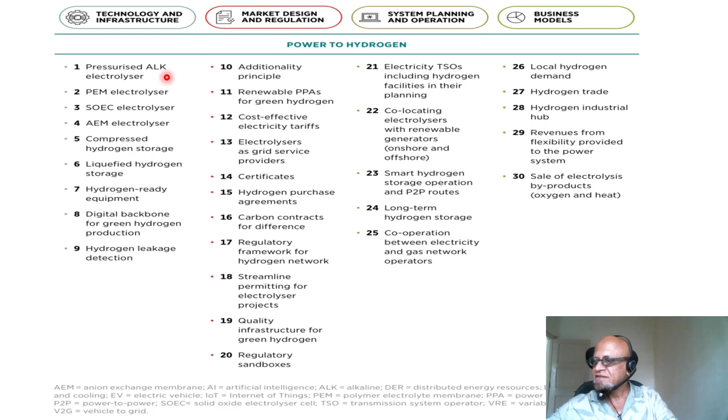Keeping that in mind, you need power to hydrogen, so you need to worry about the same things as before: technology and infrastructure, market design and regulation, system planning and operation, and business models. Let's start here. Pressurized alkaline electrolyzers.

An electrolyzer is basically where you're splitting some chemical like water to produce hydrogen. PEM electrolyzer, that's polymer electrolyte membrane. These are technologies, you can imagine there is a membrane, you are pushing water through and you are separating out hydrogen from something else. SOEC is solid oxide electrolyzer cell.

AEM is anion exchange membrane. These are technologies that I will learn about, but right now I have read about them and I'm teaching for the first time, so I don't remember all of the acronyms offhand.

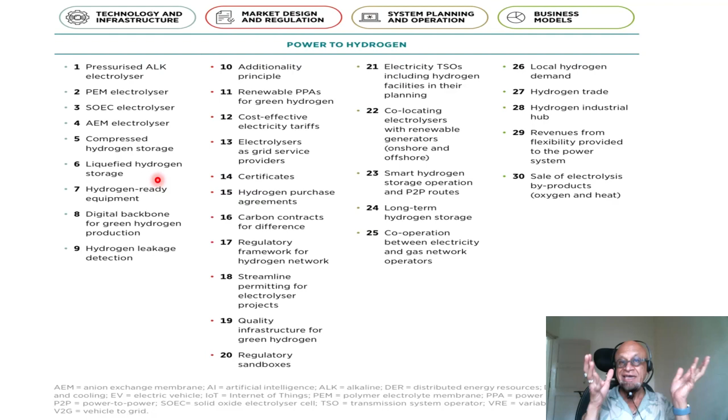Compressed hydrogen storage. Hydrogen always comes up as whether it's dangerous, whether it'll explode, how to transport it, whether it's just a pipeline or whether you can compress it enough, because it's very light, so energy density in some sense is very low compared to oil or gas, so you need to worry about carrying a lot of it in some form, so compressed storage is a big thing. Liquefied hydrogen is of course another thing.

Everything has energy associated with it, so you're always having to make sure that in an end-to-end life cycle analysis sense, whether you're producing hydrogen and compressing it or liquefying it, you're still coming out positive in terms of energy yields, right? So hydrogen-ready equipment, that's not easy, because Toyota invested a lot in fuel cells and bet big on going hydrogen, but it didn't work out, so they are struggling.

Digital backbone for green hydrogen production and hydrogen leakage detection, which is another worry that bothers a lot of people. With EVs you have range anxiety as to whether the battery will take you long enough or whether you'll have a charging station along the way. Now the range of battery vehicles on one charge is getting longer and longer, 200, 300, 400 kilometers, which makes people comfortable once they get used to it. With hydrogen you have the leakage problem that people get freaked out about.

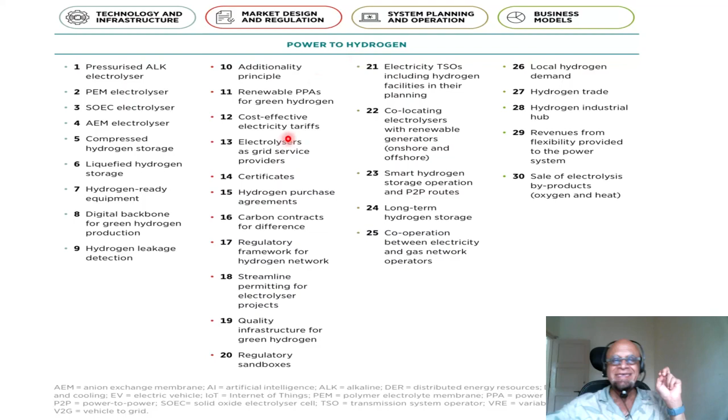In terms of market design and regulation, you have the additionality principle. Basically additionality means you are doing something that is beyond what would happen anyways. So you have to figure out what this is in power to hydrogen. Renewable PPA for green hydrogen. Sorry about that, power purchase agreement. These are when utility companies rely on aggregating and buying and selling, so power purchase agreements. Could be a town or community doing that as well.

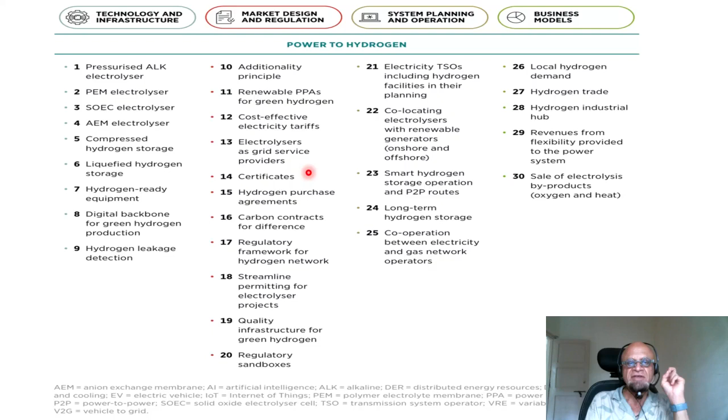Cost-effective electricity tariffs, electrolyzers as grid service providers. So can you directly go from electrolyzer technologies feeding into a power grid? That's a good way to think about it. Certificates about various requirements on safety, cleanliness, supply, reliability, whatever it is in terms of design and regulations. Hydrogen purchase agreement as opposed to power.

Carbon contracts for difference. So what is being saved additionally? Is it going to be part of the offset? Is it going to be priced in some ways, and so on? I'm being a little brief on that. You need to read up.

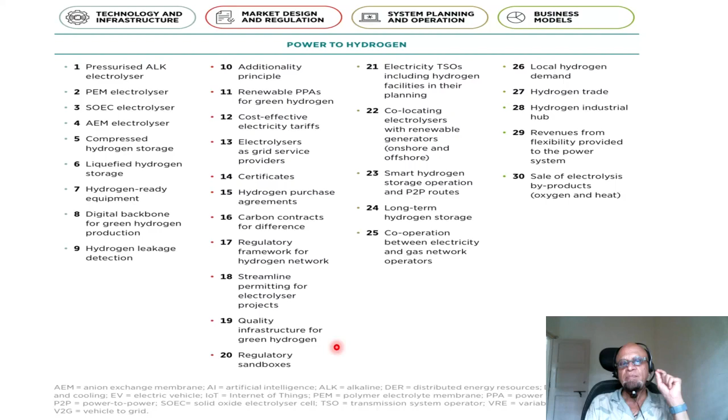Regulatory framework for hydrogen networks, streamlined permitting for electrolyzer projects, quality infrastructure for green hydrogen, and regulatory sandboxes where you play and figure out what has to evolve in terms of cost effectiveness and profitability, I suppose.

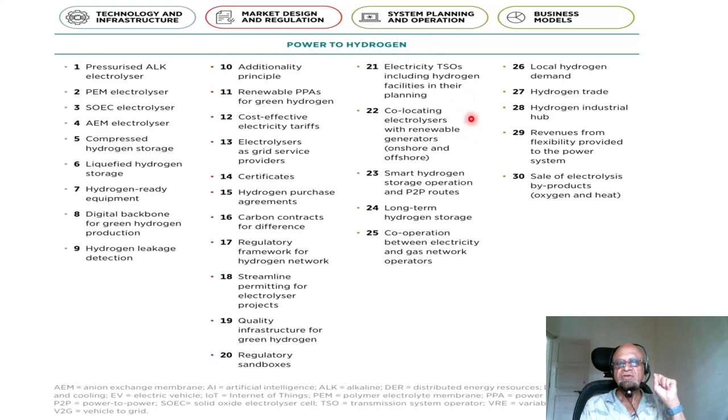In terms of system planning and operation, you have electricity TSOs, transmission system operators, including hydrogen facilities in their planning. So electricity transmission system operators must consider hydrogen as part of their planning. Co-locating electrolyzers with renewable generators, onshore and offshore. There are some ideas of offshore green hydrogen production, desalination, and so on that I have discussed elsewhere.

Smart hydrogen storage operation and P2P, which is power-to-power routes. Long-term hydrogen storage, leak proof, and maintaining the energy, pressure, liquefied, whatever is involved in long-term hydrogen storage. Cooperation between electricity and gas network operators. So you have cables running electricity, but you may need pipelines for hydrogen, just like liquid natural gas and so on.

In terms of business model, local hydrogen demand. Obviously, anytime you can do production and consumption locally, you save a lot on infrastructure, losses, costs, etc. Hydrogen trade, you can go and figure out what that means. Hydrogen industrial hub: how can you have a utility-scale hydrogen hub to serve industries? Maybe revenues from flexibility provided to the power system and sale of electrolysis byproducts like oxygen and heat.

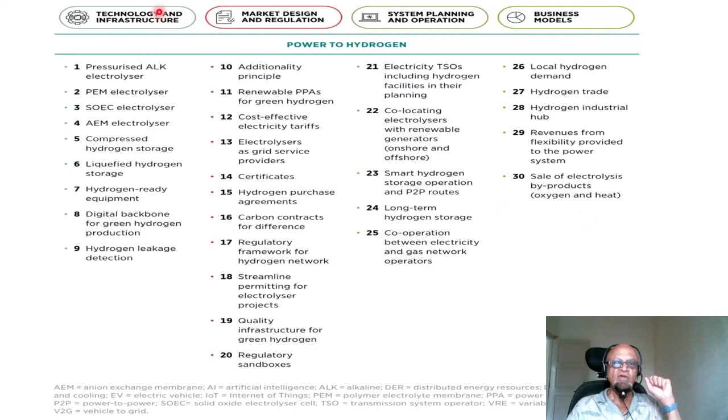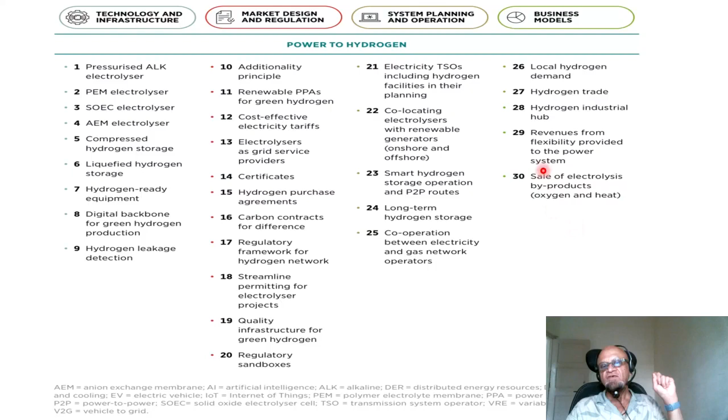So if you're splitting water with electrolyzers to produce hydrogen, then you have oxygen and of course heat being produced in the process. Splitting water by electrolysis is typically not done at cold temperatures. I'm using random words, but you have heat generated, so can that be captured and used as well?

Okay, so following the other podcasts, we will leave power to hydrogen by itself, and I should be able to conclude in the next podcast as far as smart electrification is concerned. So we looked at end-use sectors here, basically power for mobility, power to hydrogen, and power for heating and cooling. Okay, come back and see you in the final podcast of smart electrification.